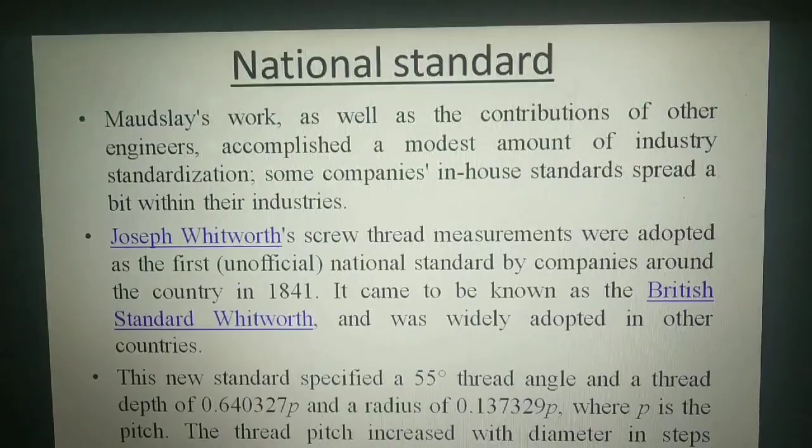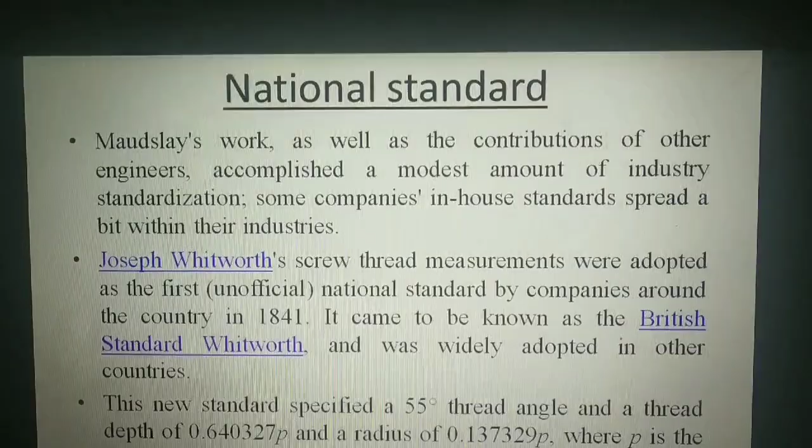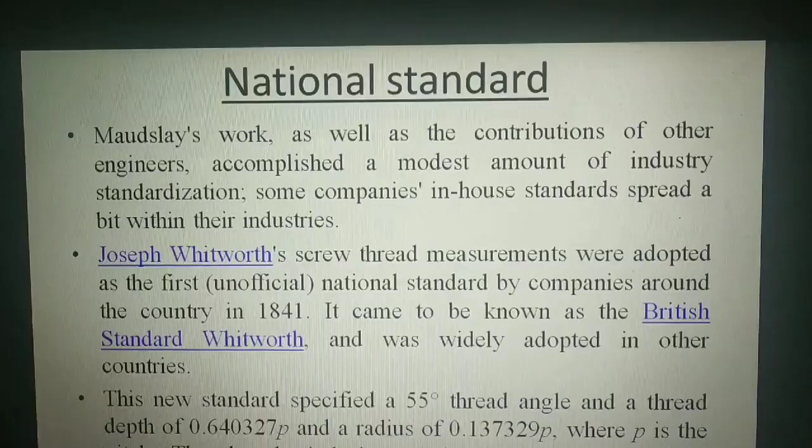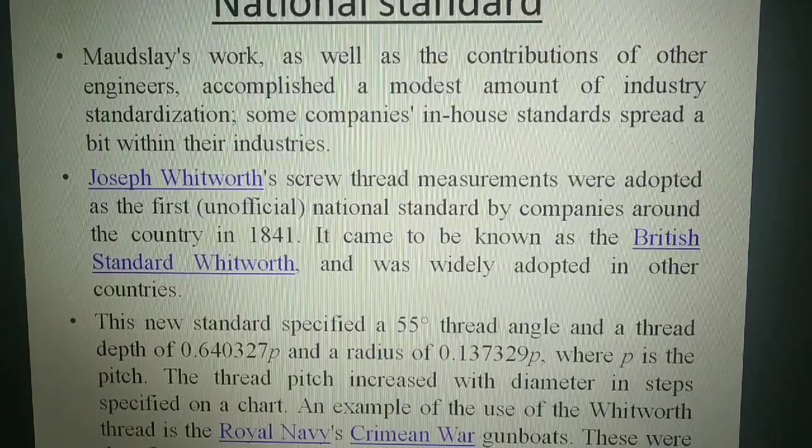Now come to the next point, national standard. Maudslay's works as well as the contribution of other engineers accomplished a modest amount of industry standardization. Some companies' in-house standards spread a bit within their industries. Joseph Whitworth's screw thread measurements were adopted as the first unofficial national standard by companies around the country in 1841. It came to be known as the British Standard Whitworth and was widely adopted in other countries.

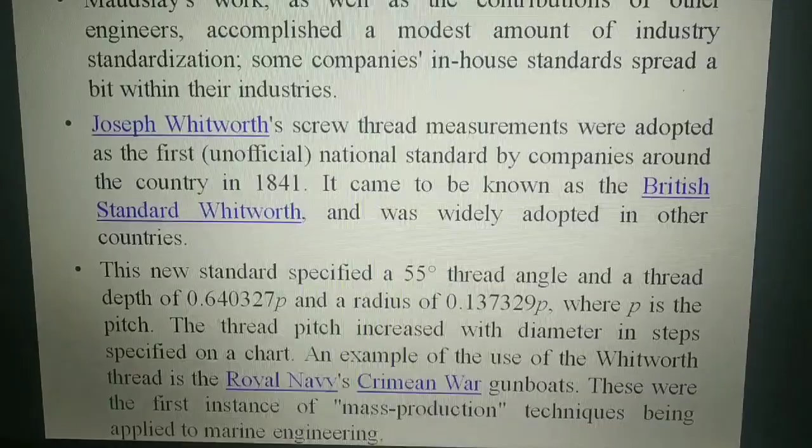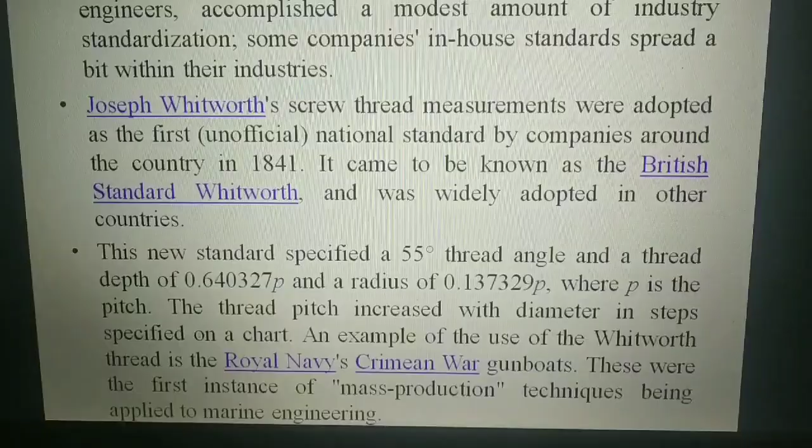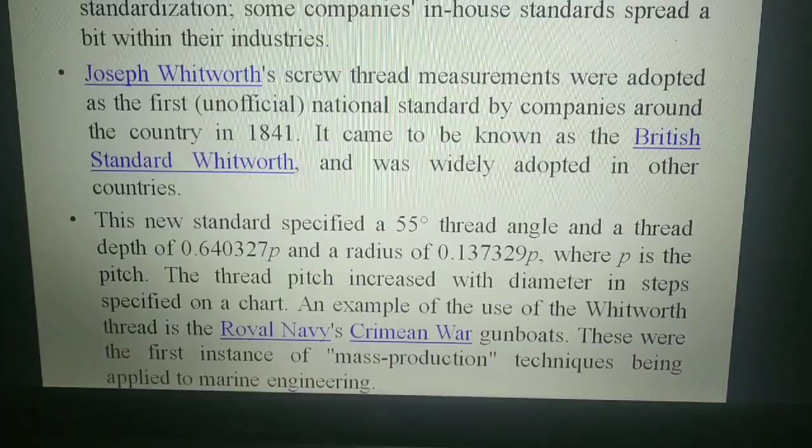This new standard specified a 55-degree thread angle and a thread depth of 0.640327 p and a radius of 0.137329 p, where p is the pitch. The thread pitch increased with diameter in steps specified on a chart. An example of the use of the Whitworth thread is the Royal Navy's Crimean War gunboats. These were the first instance of mass production techniques being applied to marine engineering.

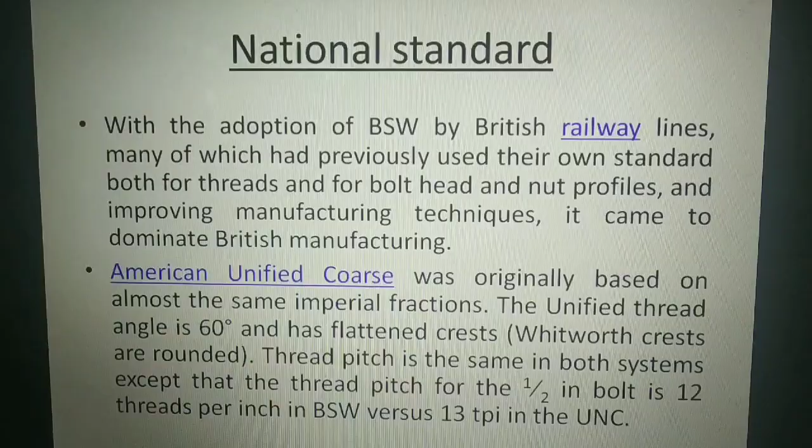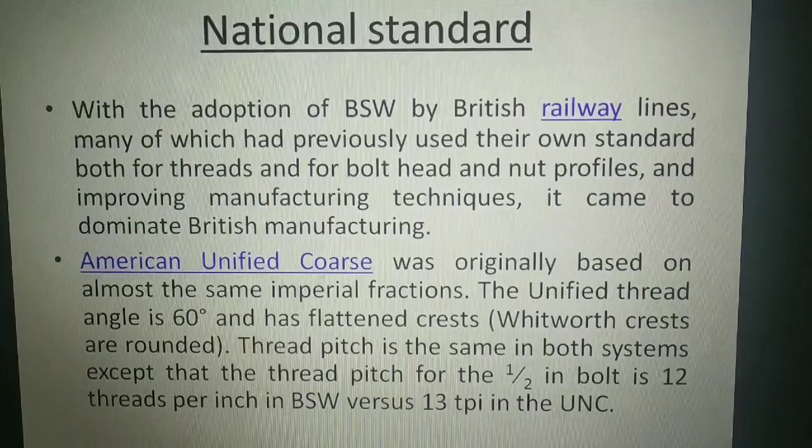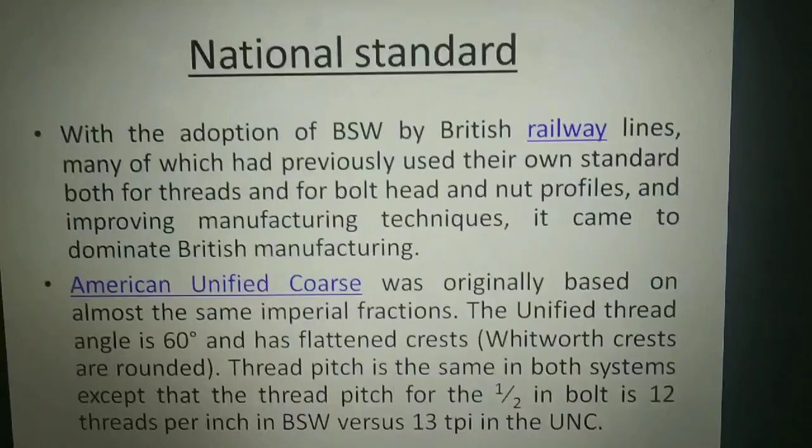Come to the next point, American Unified Coarse was originally based on almost the same imperial fractions. The unified thread angle is 60 degrees and has flattened crests. Whitworth crests are rounded. Thread pitch is the same in both systems except that the thread pitch for the half inch bolt is 12 threads per inch in BSW versus 13 TPI, threads per inch, in the UNC.

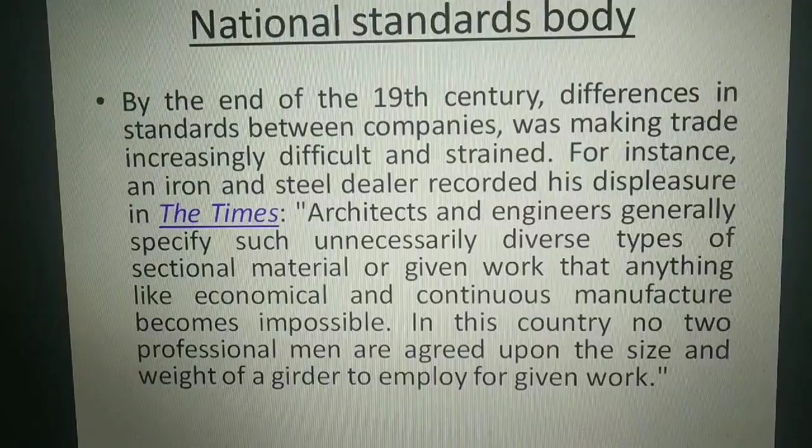Now come to the next point, national standards body. By the end of the 19th century, differences in standards between companies were making trade increasingly difficult and strained. For instance, an iron and steel dealer recorded his displeasure in the Times: Architects and engineers generally specify such unnecessarily diverse types of sectional material for given work that anything like economical and continuous manufacture becomes impossible in this country. No two professional men are agreed upon the size and weight of a girder to employ for given work.

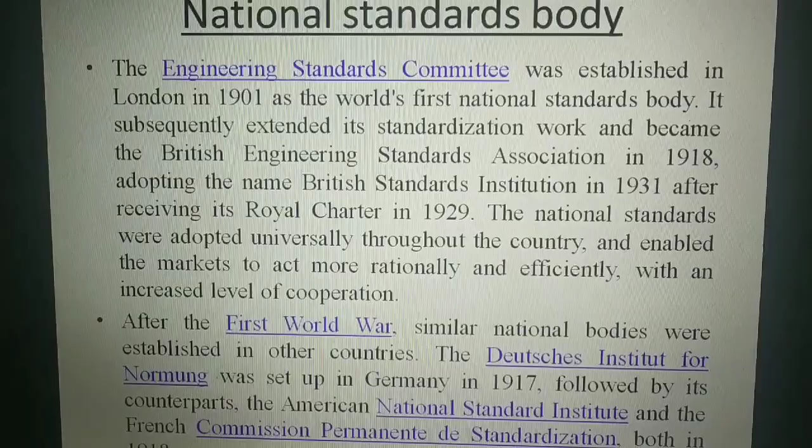The Engineering Standards Committee was established in London in 1901 as the world's first national standards body. It subsequently extended its standardization work and became the British Engineering Standards Association in 1918, adopting the name British Standards Institution in 1931 after receiving its Royal Charter in 1929. The national standards were adopted universally throughout the country and enabled the markets to act more rationally and efficiently with an increased level of cooperation.

After the First World War, similar national bodies were established in other countries. The Deutsches Institut für Normung was set up in Germany in 1917, followed by its counterparts, the American National Standards Institute and the French Commission Permanente de Standardisation, both in